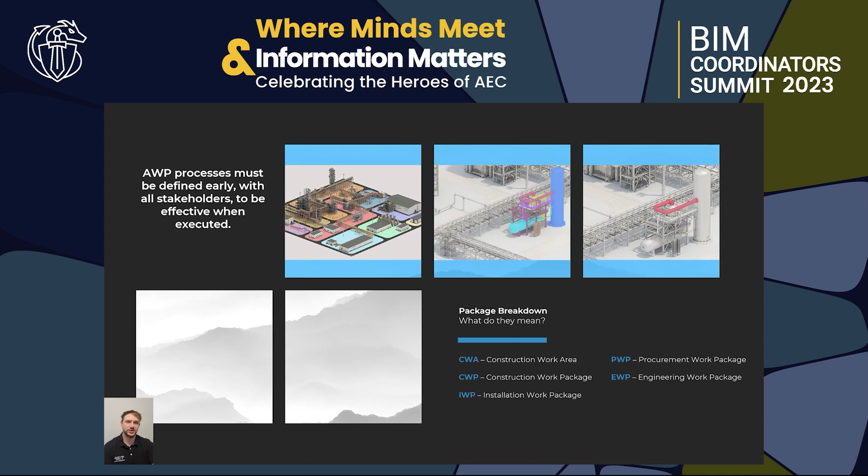At its core, AWP focuses on breaking down projects into smaller, more manageable chunks, and the philosophy is to support logical construction sequences, getting people what they need when they need it. It's a collaborative way of planning, and these smaller containers of work are perfect for 4D integration.

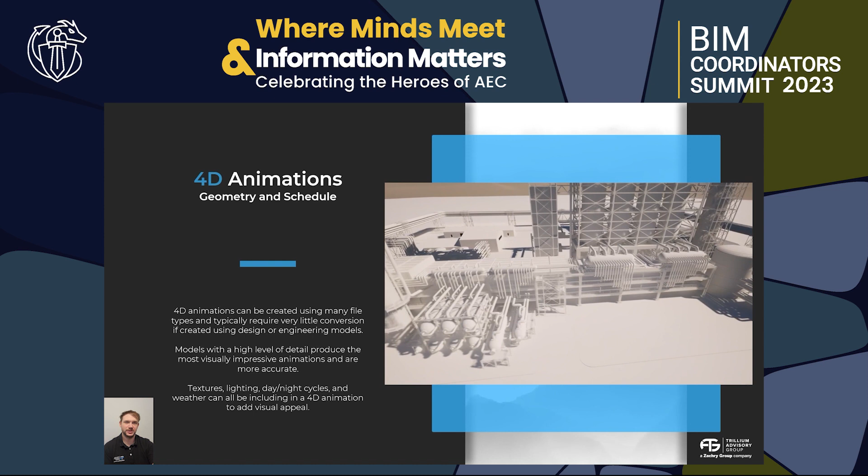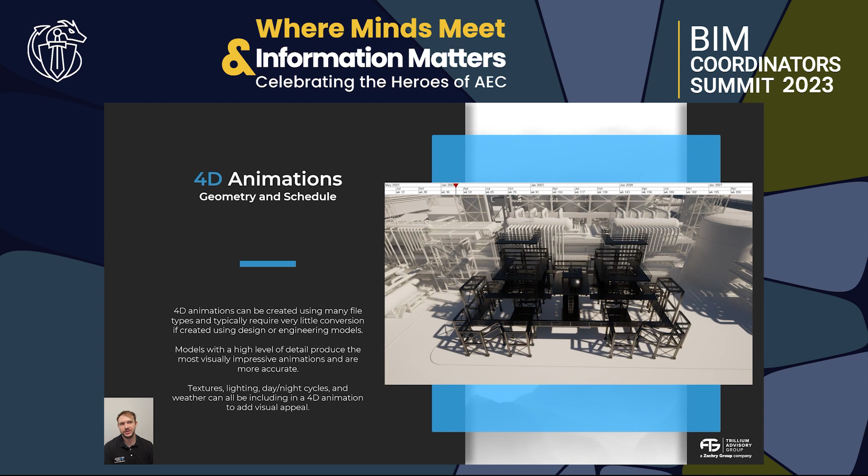4D animations are very simple in their concept. It's simply a connection between model geometry and schedule information that produces a visual of process or project progress. At Trillium, we build all kinds of 4D animations, and they typically aim to achieve a certain task or hit a specific metric. That means 4D animations can be created at any stage of a project and still have a tremendous amount of impact.

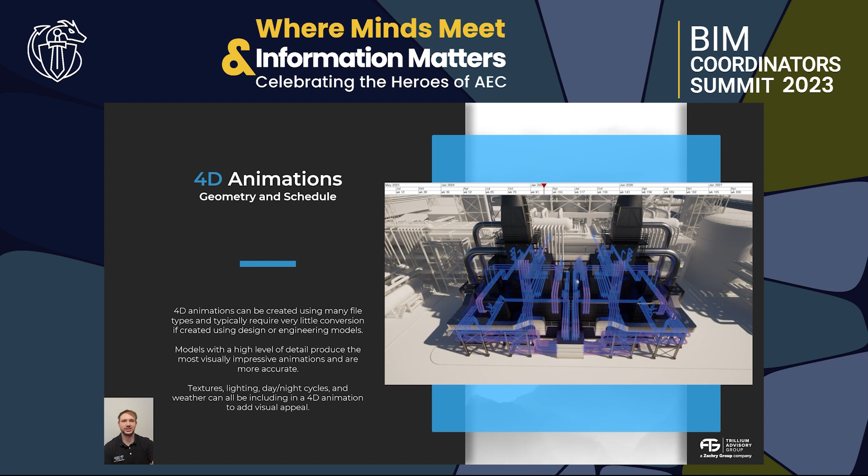Some of the animations are destined for proposal work, giving the team a strategic edge in catching the owner's eye or showing the amount of thought that went into making sure a plan is possible. 4D animations have a level of flash or appeal, and that helps teams sell the project.

When I mentioned earlier that owners are demanding more transparency during these projects, 4D animations can help achieve that. Not every stakeholder is going to understand a project from a set of drawings, some renders, or even a few static images of a model. Everyone can understand a visualization on some level, which makes proposals easier to digest by important decision makers or people who typically wouldn't have too much of a say in the project.

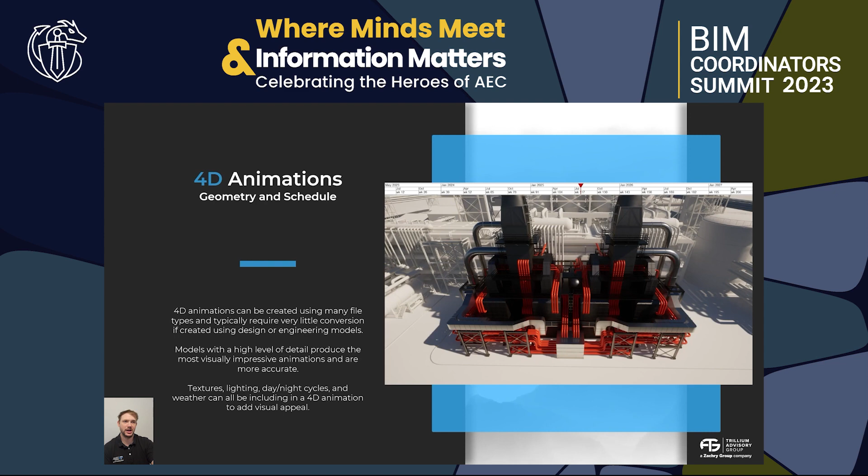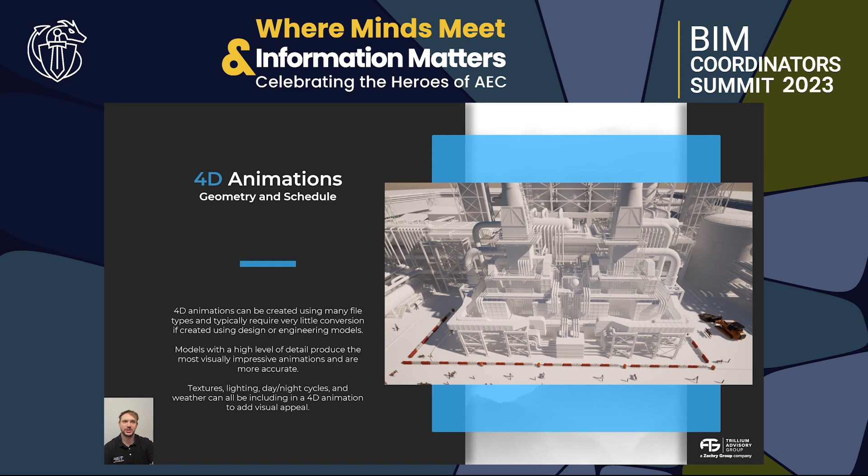By utilizing 4D early on, teams can begin planning laydown and material management strategies that evolve throughout the project's lifespan. We can begin building safety into our plans and visualizations by simulating heavy lifts or planning time-restricted areas.

Imagine having the ability to reference a 4D animation any day of the week and being able to physically show new hires or site visitors the exact areas that they should avoid or are not allowed to be in. Building safety into our 4D animations is key to keeping everybody safe.

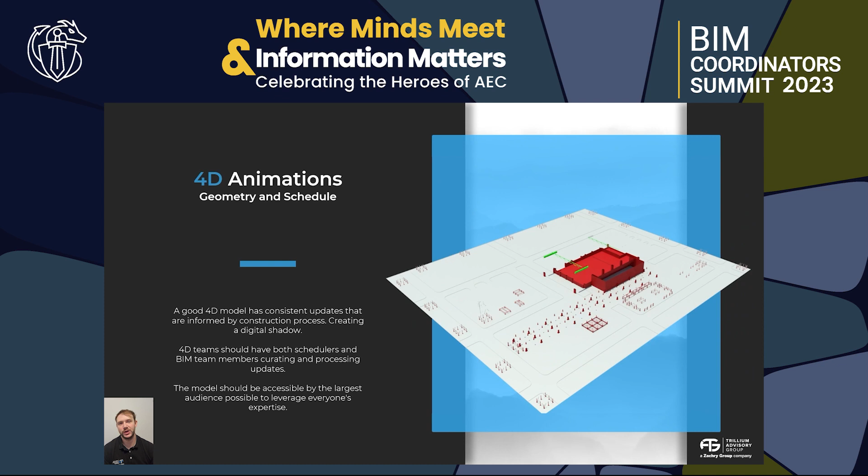During construction, utilizing a 4D animation takes on a different role. It makes sure the project is staying on track, and it also becomes a sandbox for finding solutions to return to that critical path if the schedule does start to slip.

By testing non-destructive alternative scenarios, teams can improve the project plan. Making adjustments to a sequence or pivoting to an alternative work area, we can help the project always advance and be better. We can also predict completion rates of areas or systems based on current or increased manpower.

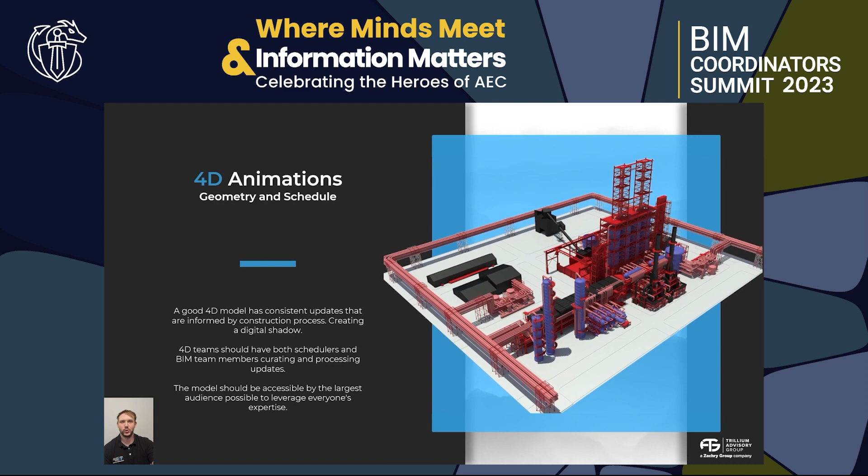We can visualize procurement status, we can create handover plans, and report all of this information to every stakeholder in a digestible way. With a 4D enabled project, we are creating project insights that take 30 seconds to digest instead of 30 minutes. 4D content isn't a boring spreadsheet or a PDF that no one will ever read.

It's information designed to positively impact any project it is deployed on by providing valuable metrics to make data-driven decisions, not emotional ones.

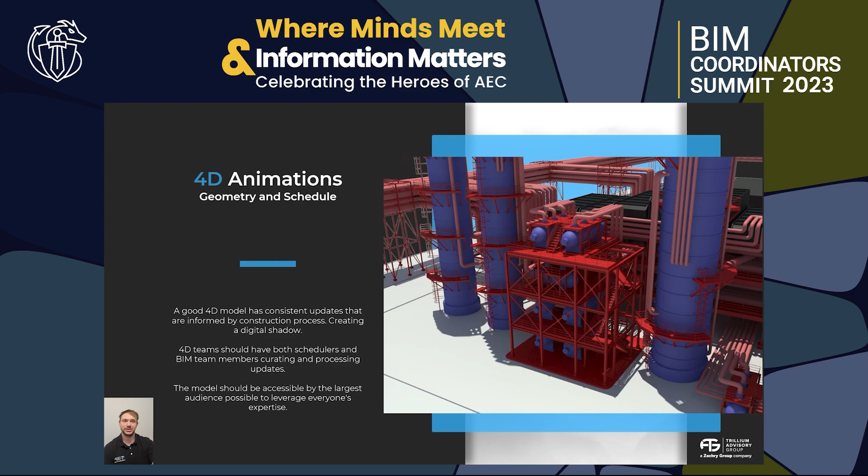Which makes AWP and 4D better together. AWP and 4D work in tandem to provide a better end product. They do this by naturally complementing one another in the deliverables they produce, or by utilizing the data generated in either system to enhance the other.

AWP and 4D both want to increase in detail as the project progresses, and AWP helps 4D animations stay relevant by providing this path to completion.

Since AWP is construction focused, the IWP level animations are highly accurate and correlate to the way things would really be assembled in the field. This alignment with real-world processes creates a 4D animation that is accurate and can be used to discover faulty sequencing or provide context to workers who might look to deviate from the construction model.

This shows workers the ripple effects or brings awareness to the potential clashes they could cause by straying from the model. 4D also acts as a model metadata validation tool, which helps projects move forward towards a digital future where digital twins are the norm.

Talking about metadata, teams that model for AWP projects include specific metadata fields in all of their model elements. These fields are codified according to AWP standards, which means they are highly consistent in their application and execution.